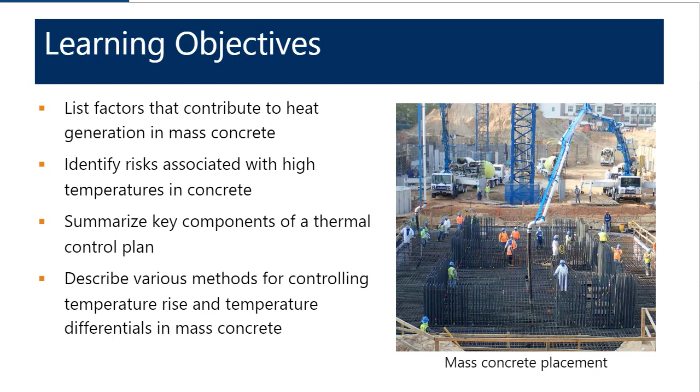So here's an overview of the four main topics that we plan on tackling today. We want to understand how to identify mass concrete, how to specify mass concrete, what are the critical components for developing a thermal control plan, and ultimately how to execute and implement it in the field.

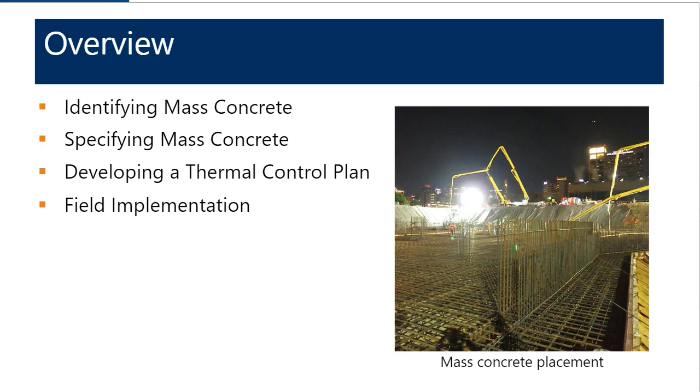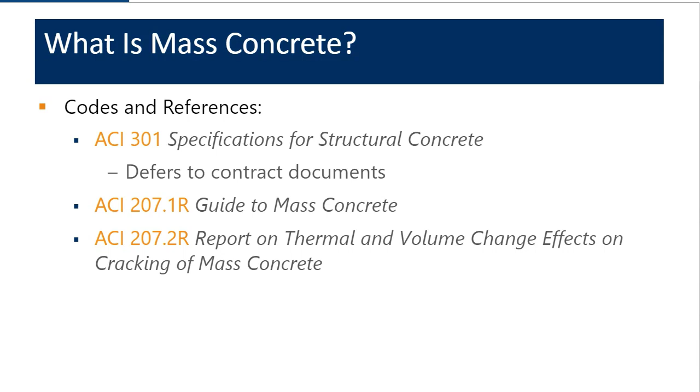So let's talk about mass concrete. How do we know it's mass concrete? As we dig into this topic, folks should understand that there are ACI references, specifically ACI 301 and ACI 207, mass concrete, that can help with understanding mass concrete. ACI actually has a definition of mass concrete. If you look at the ACI terminology document, they provide this wonderful definition for mass concrete.

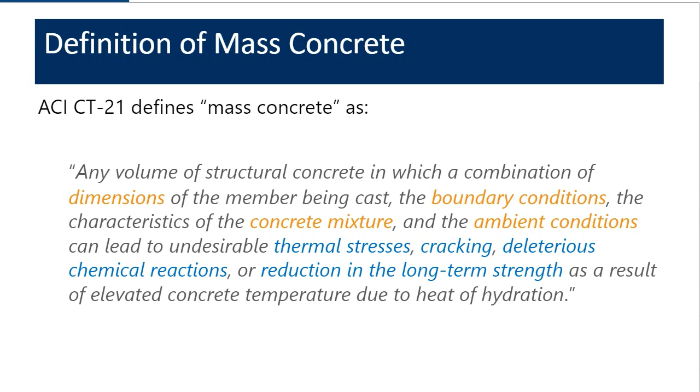And if you read this definition, what you'll notice is the definition of mass concrete is kind of mass concrete. It doesn't specifically identify the size or the dimensions of a mass element. So what is mass concrete? Well, how is this any different than maybe a concrete slab on ground that's 6 inches in thickness?

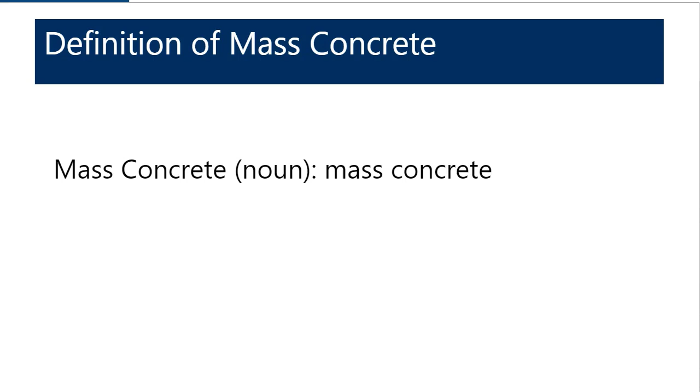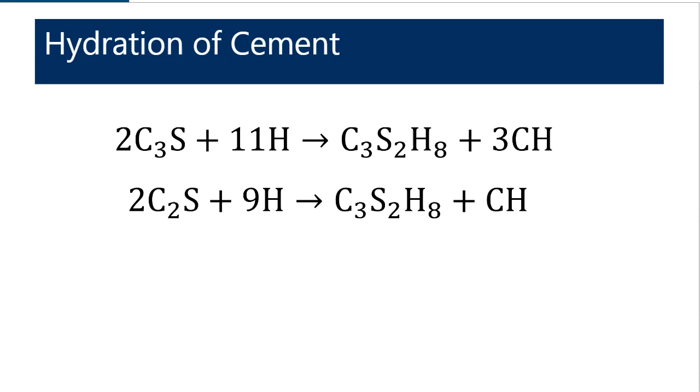So what we need to remember is concrete is chemical. I don't necessarily want you folks to understand this chemical equation that's on the slide, but what I want you to understand is that the hydration of cement is an exothermic chemical reaction. If you take a little bit of water and a little bit of cement and put your hand over it after it's been mixed, you can actually feel the heat that's being generated. If you take a lot of cement and a lot of water, you can end up with a lot of heat. That's what we're concerned about, is the amount of heat that's being generated.

So for some mass elements, that exothermic chemical reaction can generate temperatures up to 160, 170, and in some cases, if precautions aren't taken, up to 200 degrees Fahrenheit, which is a significant amount of heat when you compare that to boiling water, for example.

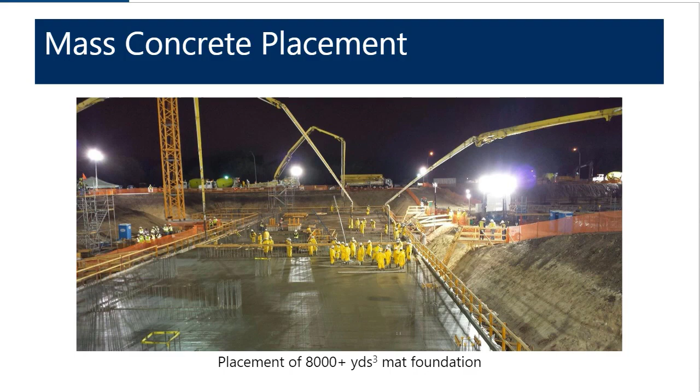So what's the problem? The big issue is cracking. The two things that we want to think about are thermal cracking and a phenomenon called delayed ettringite formation, which can occur later, that can also cause cracking.

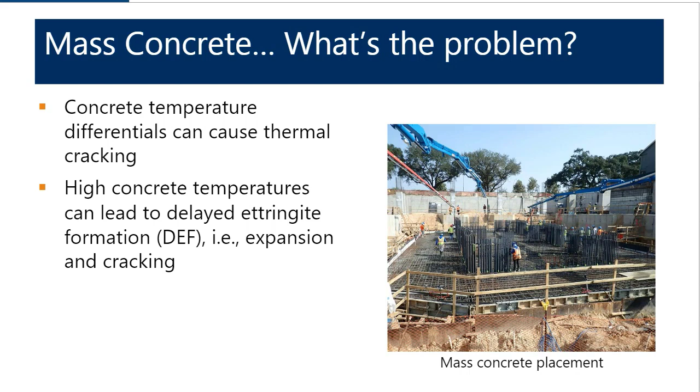So let's talk about thermal cracking. How does that occur? Here's a column, 8 foot in diameter, that had thermal cracks shortly after it was placed. The temperature difference between the cooler surface of the concrete, which can contract relative to the warmer inner core of the concrete, results in tensile stresses along the surface. And when those tensile stresses on the surface exceed the in-place tensile strength, you can get cracking.

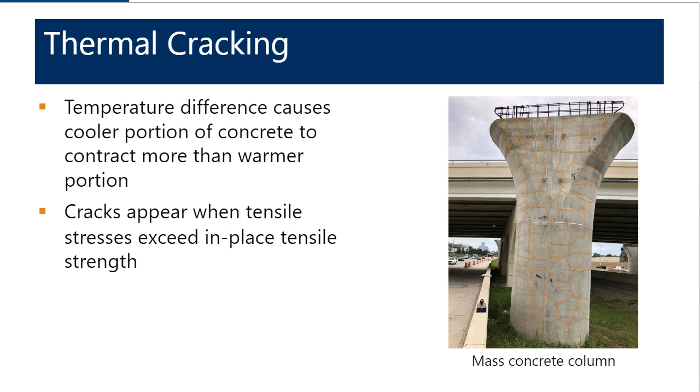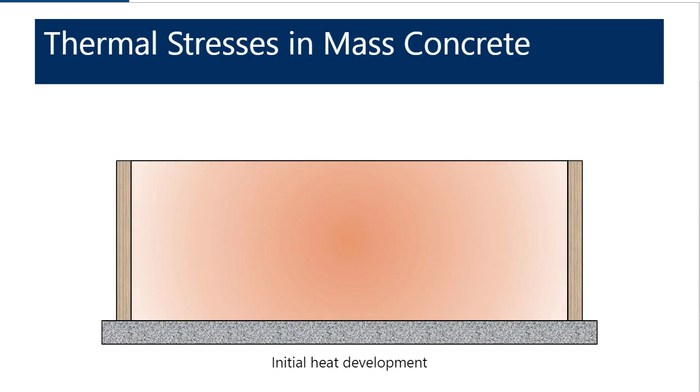So here's a schematic diagram showing the initial heat development of a mass element that's placed on a mud slab, for example, and formed up on the sides. As that heat continues to generate on the inner core, what you'll see is the surface then cools. And as those tensile stresses are introduced, you'll end up with cracking at various points along that element.

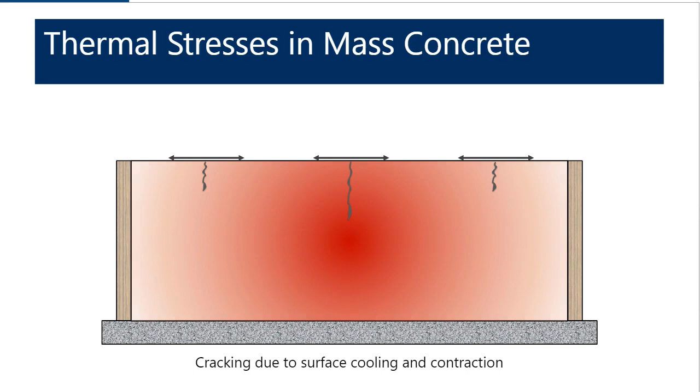One of the other things that we're concerned about is this phenomena called delayed ettringite formation. DEF, or delayed ettringite formation, is the formation of ettringite after the concrete has already hardened, which can later cause the expansion and cracking of the concrete.

Under certain circumstances, primarily exposure to elevated temperatures during curing, the ettringite is suppressed and then may form after the concrete is hardened. The volume of the ettringite compound is larger than the volume of the original component materials, which can lead to the internal expansion and subsequent cracking of the hardened concrete.

So Elizabeth is now going to talk about specifying mass concrete.

Thanks, Jacob. So let's go back to that ACI concrete terminology definition of mass concrete for just a minute. ACI's definition essentially says that a combination of dimensions, boundary conditions, the concrete mixture, and ambient conditions are going to lead to thermal stresses, cracking, deleterious chemical reactions like DEF, or potential reductions in long-term strength gain, all due to the elevated heat of hydration of the cementitious materials. And that's really what makes mass concrete.

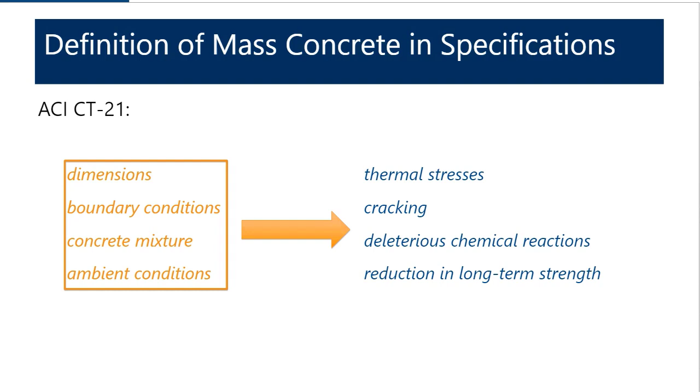So let's go back to that ACI definition again. It's not just the dimensions, but really the combination of the dimensions, boundary conditions, concrete mixture proportions, and ambient conditions that make something possibly mass concrete. And so newer specifications, like I'm about to show, actually take all of these factors into account.

And so here's another specification that we've dealt with. This particular specification, just like the last one, requires all elements with a section thickness greater than 3 feet or more to be considered mass concrete. But it also includes a portion that says that it's any system that approaches a maximum temperature of 158 degrees Fahrenheit within the first 72 hours.

And that way, it can also include elements that are thinner than 3 feet that may have other reasons for that heat gain, whether that's related to the environmental conditions, the concrete mixture proportions, or the boundary conditions, or any combination thereof.

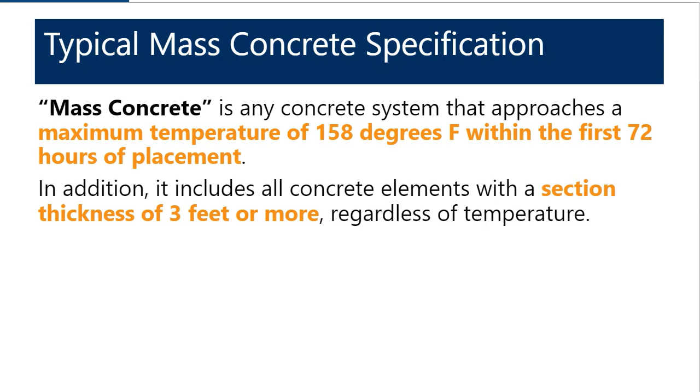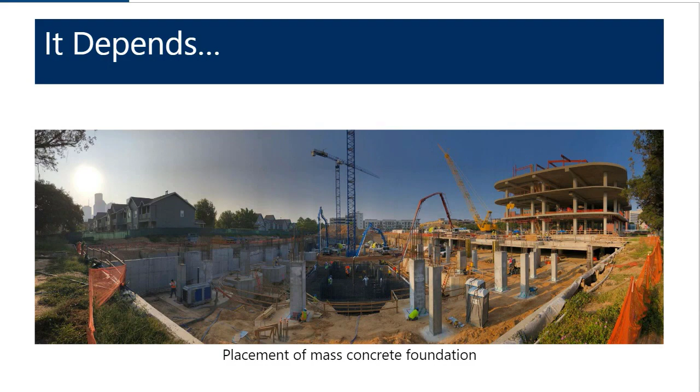So really, what is mass concrete? An engineer's favorite answer is it depends. And as it depends on a lot of things, ACI has recently published some revised guidance on how to define mass concrete. Specifically, ACI 207.1, which is the Guide to Mass Concrete, now talks about two categories of what they're calling mass and thermally controlled concrete.

The first category is traditional mass concrete. So these are large placements that many of you probably think of when you think of mass concrete. Things like dams, abutments, foundations, slabs, very large elements where the thickness is going to govern the temperatures that are generated.

But there's also this newer category that they've talked about called thermally controlled concrete. And these are typically smaller placements. In these cases, the temperatures are more governed by the specific concrete mixtures, which have a high potential for temperature rise. This may be because they contain a lot of cement or cementitious material, or it may be because they're designed to achieve very rapid early strength gains. The more rapid your strength gain, the higher potential you have for early age temperature rise in your mass concrete.

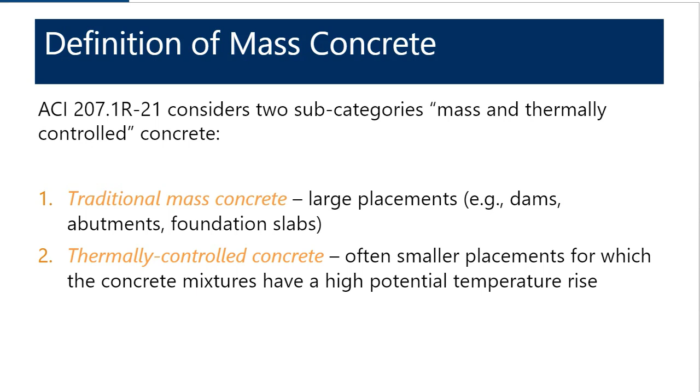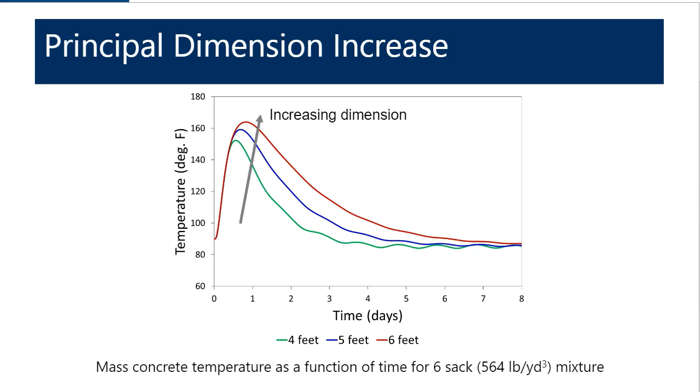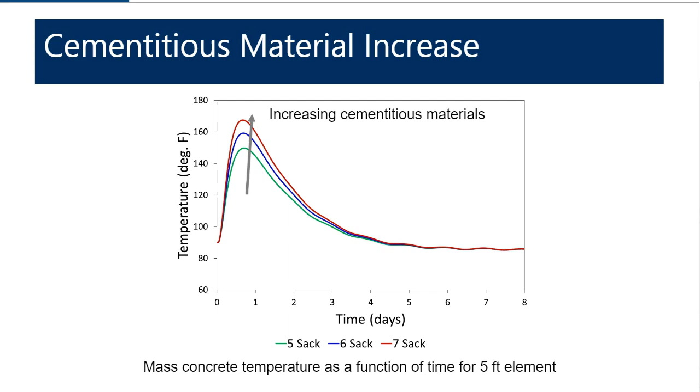The cementitious materials similarly have an effect. This graph shows the impact of increasing the total amount of cementitious material, or cement plus SCMs, in the mix. For example, an increase from a 5-sack mix with 470 pounds of cementitious material, all the way to a 7-sack mix with 658 pounds per cubic yard. Just like with increasing the dimension, as you increase the total amount of cementitious material in the mix, there's also an increased potential for temperature rise.

You can have an element that's, say, 6 feet thick but only has 300 pounds of equivalent cement content, and that might not require a thermal control plan even though it's 6 feet thick. However, you can also have an element that's 2 feet thick with 1,000 pounds of cementitious material, and even though that's only 2 feet thick, that's considered mass concrete because it falls into this class of thermally controlled concrete. We've actually encountered situations where we've had 2-foot thick elements that we've had to write thermal control plans for because the concrete had so much cement in it.

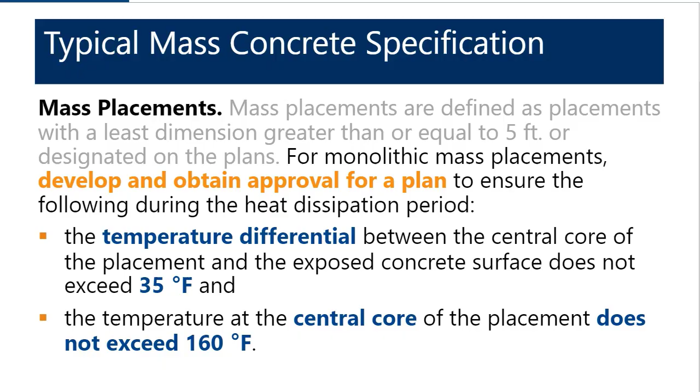So let's talk a little more about these thermal control plans. A thermal control plan is a document that describes the specific measures used to control these temperatures, both the maximum temperature and the maximum temperature differences. It also includes specific methods that are used to demonstrate that these limits are not exceeded.

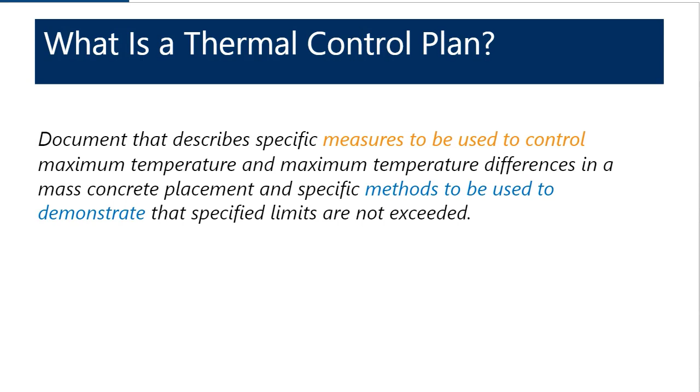Typical contents will include things like the concrete materials and mix design, the predicted temperature rise of the concrete, which is based on the concrete materials and mix design, the element dimensions, boundary conditions, and so on—all the factors that contribute to the definition of mass concrete. It will include limits on concrete placement temperatures, based on those predictions of temperature rise. It'll include instructions for monitoring the temperatures in the placement to make sure those limits aren't exceeded. It'll include surface temperature controls, like applying insulation to make sure the differentials aren't exceeded, in addition to how long those controls need to remain in place.

It will also include contingencies. What should you do in the event that you either exceed your maximum temperature or exceed your maximum temperature differential? Or, in better practice, what happens if you come close to exceeding those, so that you can take steps proactively to avoid exceeding those limits in your actual placement?

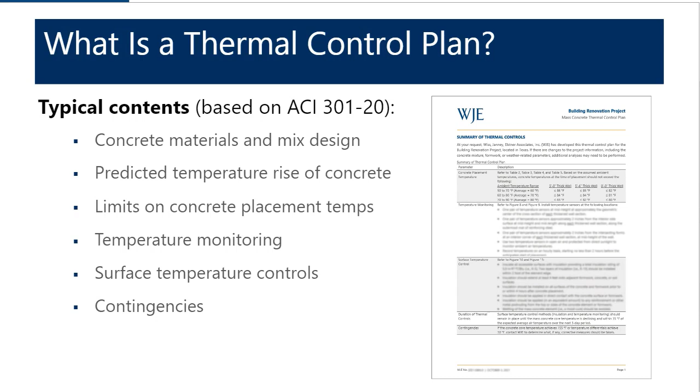There are 4 basic steps to developing a thermal control plan. The first is to review the concrete mixture design and project documents to understand what the system is. Using that information, you conduct a thermal analysis of the mass concrete placements. Then, based on those analysis results, you provide recommendations for methods to control the concrete temperature and instructions for measuring the concrete temperatures. We'll address each of these briefly.

We'll start with the first two, which is reviewing the mix design and conducting the thermal analysis. As we've talked about, mass concrete temperature is a function of several factors, including the element size, the concrete mixture design, construction methods such as the use of formwork or insulating blankets that might help trap heat in the placement, and environmental conditions, such as the time of year.

If you're placing in warm months, you might have a greater potential for temperature rise, but if you're placing in cooler months, you may have a greater potential for thermal differentials or thermal gradients that might cause cracking. It'll also include things like the temperature of the concrete when it's placed, how long it takes to place the concrete. And then there's also pre and post cooling methods that you can use to help control the temperatures of the concrete, either before or after it's placed. We'll talk about each of these.

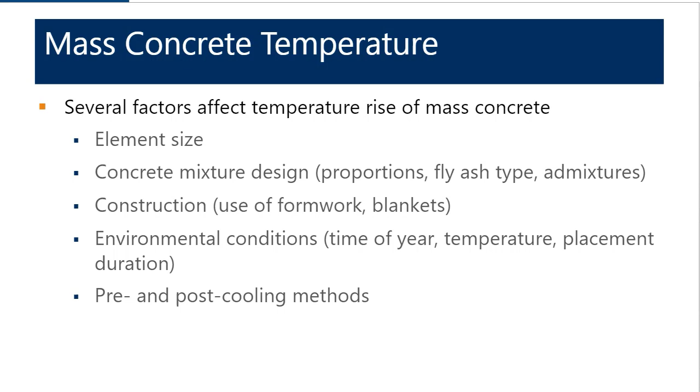All of these factors influence the potential temperature rise in a mass concrete placement. And to develop a thermal control plan, it's often useful to perform a thermal analysis that takes into account all of these factors in order to predict the actual temperatures for the placement.

These factors are then considered for many different combinations of environmental conditions, concrete placement temperatures, and insulating conditions. We can use this thermal analysis procedure to proactively address concerns related to mass concrete placements before concrete is even placed. We use this to develop our understanding of how the concrete element will respond to these changes, so we can specify what temperatures and insulating conditions we need for various environmental exposures and concrete mix designs, in order to not exceed the project's specified maximum temperature and maximum temperature difference limits.

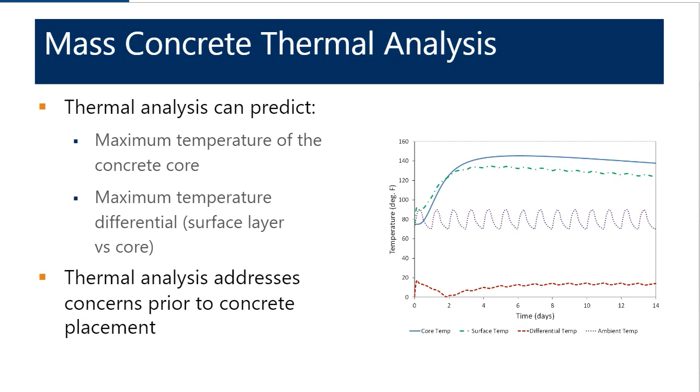As we've talked about, the concrete mixture design and total cementitious materials have a very large impact on the total amount of heat generated. There are ways we can reduce some of the heat generated by a concrete mixture, and one of the most effective ways is by using a high percentage of fly ash, up to 50% depending on the type of fly ash you use.

Class F fly ash is a particularly efficient material for reducing heat generation in concrete. It can help reduce the amount of heat released by a concrete mixture by up to about 50% of the equivalent amount of cement it replaces. Class C fly ash is not as efficient as Class F fly ash at reducing temperatures; typically it generates about 80% of the heat of the cement it replaces. Slag is a little less efficient, typically between about 80 and 90% of the heat of the cement it's replacing. But using SCMs is a very effective way, especially Class F fly ash, of reducing the heat signature of your concrete mix.

In terms of temperature differentials and the risk of thermal cracking, the use of different concrete aggregates can also help reduce that risk. In particular, limestone has a lower coefficient of thermal expansion than granite. So if you have the option to use a limestone aggregate versus a granite coarse aggregate, because the concrete containing limestone will have a lower coefficient of thermal expansion than an equivalent mixture containing granite, the risk of thermal cracking can also be reduced through the selection of those lower coefficient of thermal expansion aggregates.

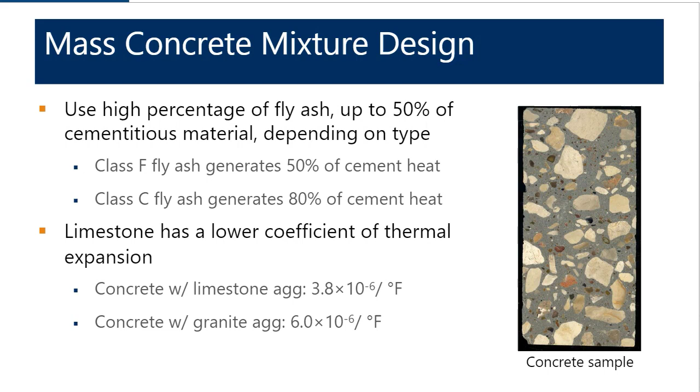One of the ways we can enhance a thermal control plan and our understanding of mass concrete behavior is by measuring the adiabatic temperature rise of a concrete mixture. The adiabatic temperature rise is sort of like a heat signature of a concrete mixture—basically how much heat or temperature rise can be generated by a concrete mixture based on its total amount of cement, its SCMs, and the particular ones being used for a project.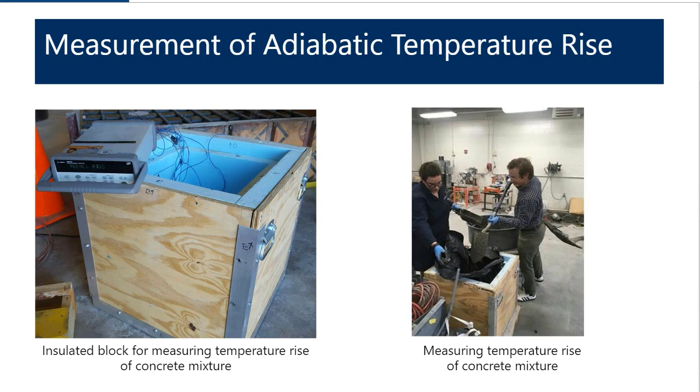So basically what that means is if you have a very large element, say a 12-foot thick element, you can expect the interior of that element to rise by about 80 degrees Fahrenheit. So if you're trying to limit your total internal temperature to less than 160 degrees Fahrenheit, this might relate to your placement temperature. If you have a 160 degree maximum and expect 80 degrees temperature rise, you want to make sure your placement temperatures are less than 80 degrees to stay under that limit.

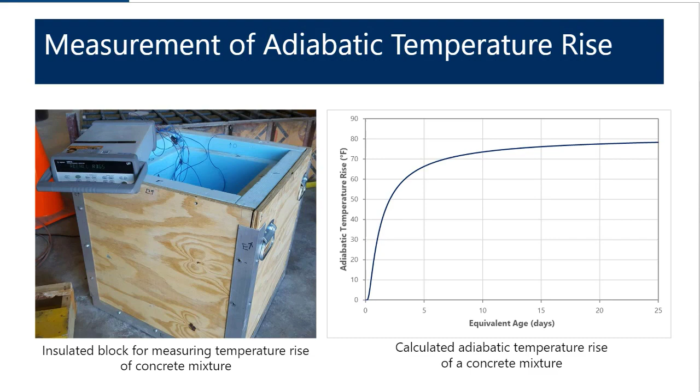The second part of developing a thermal control plan, the third step rather, is to provide methods for controlling the concrete temperatures. We've talked about controlling peak temperatures by limiting the placement temperature, which is called precooling. You can also post-cool your concrete, using cooling pipes to draw heat out while it's curing. Jacob will talk in more detail about both of these options, but both will come into play in the thermal control plan.

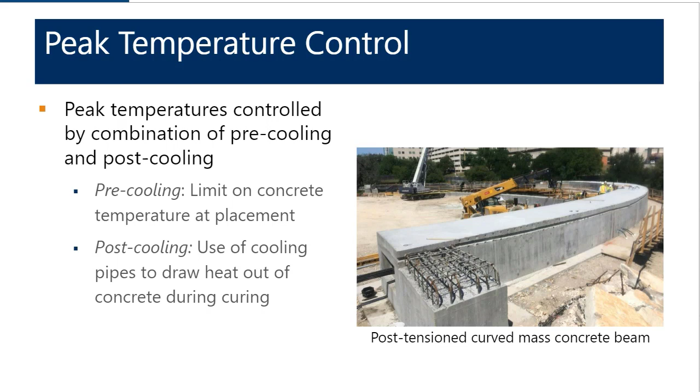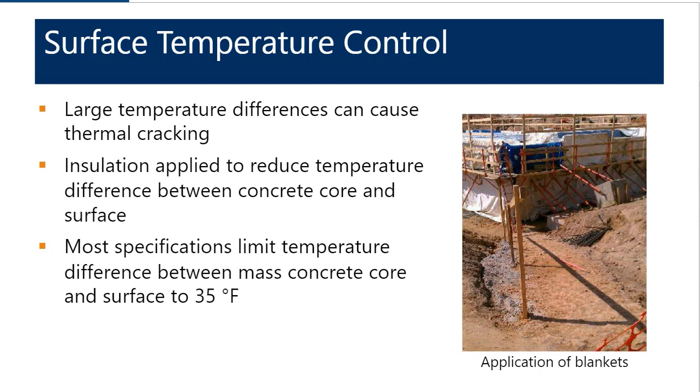For surface temperature controls, because large temperature differences can cause thermal cracking, one of the things you often need to do with a mass concrete placement is apply insulation to the surface of the element to help reduce the temperature difference between the interior core and the surface. The insulation slows the rate that the surface is cooling, so those temperature differences don't become too large. Most specifications limit the temperature difference between the center and surface to about 35 degrees Fahrenheit, but you can look at alternatives, such as a performance-based temperature difference limit.

This temperature difference limit is based on the risk of cracking, and it considers the specific coefficient of thermal expansion of the concrete mixture. Recall that certain aggregates will expand more or less than others. It also considers the maturity of the concrete with respect to compressive strength, tensile strength, and modulus of elasticity, and the degree of restraint. I'll come back to this maturity in just a second.

Going back to the idea of maturity, you might be familiar with a maturity curve for compressive strength. Basically, this calculates maturity, which is essentially the product of the age of the concrete times its temperature history, in a very general sense. Using that maturity, you can plot as a function of maturity what the compressive strength development of the concrete is, and get what's called a maturity curve for compressive strength.

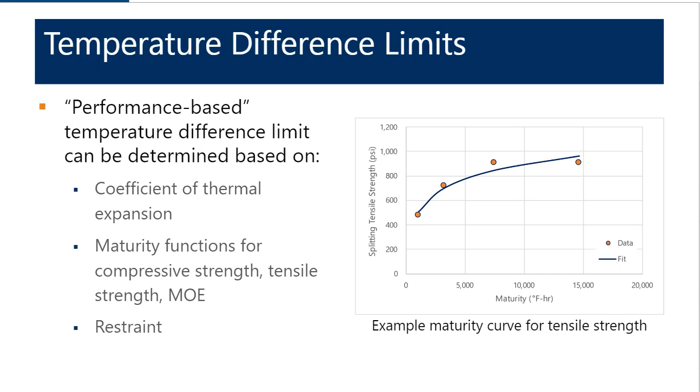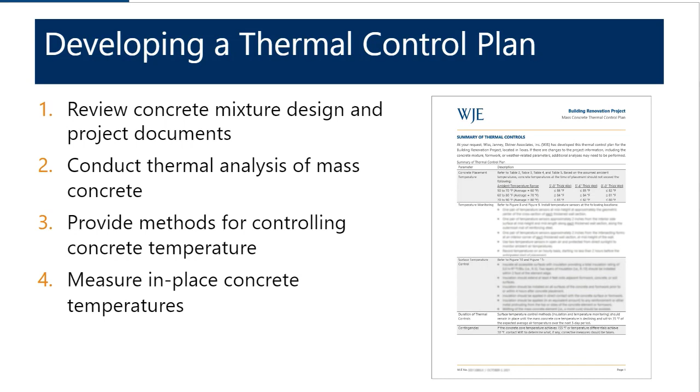The last portion of developing a thermal control plan is to develop methods for measuring the in-place concrete temperatures. Monitoring concrete temperatures is performed using temperature sensors, and typical placement for these sensors is at the geometric center of an element, or at the location where you expect the highest temperatures to be achieved. Usually this is the geometric center, but sometimes, depending on if the element has blockouts or other features, it might be a little offset. So you want to install a sensor at that location.

We also recommend that temperature sensors are installed in ambient air to measure the ambient temperature and atmospheric conditions, as far as validating the thermal model and also understanding what the risk of thermal cracking would be if insulation were to be removed.

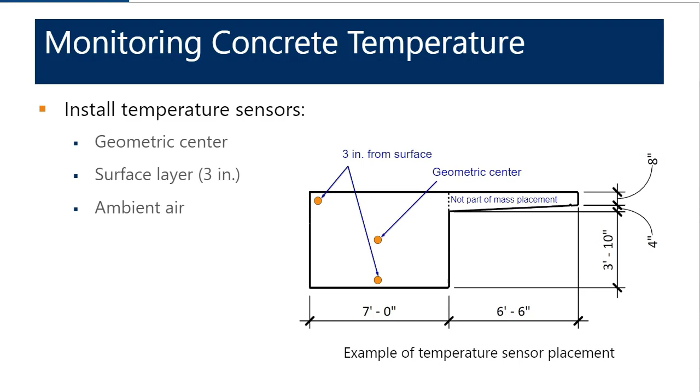So now I'm going to turn it back over to Jacob to talk about how we actually implement these recommendations in practice.

So this is the fun part. Now that we've specified it, we've analyzed it, developed our thermal control plan, now we get to actually have some fun. When we start talking about implementing a mass concrete placement, one of the first things we want to do is a pre-placement meeting. We want to figure out how we're going to monitor and measure the placement temperature, the controls we're going to put in place for the temperature of the mass element, and how we're going to monitor the temperature of the element as it cures.

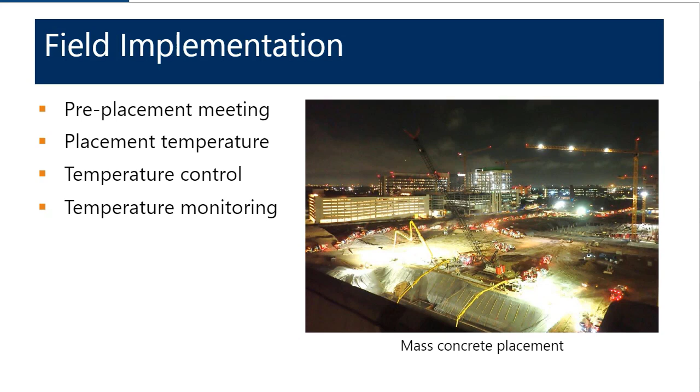Pre-placement meeting. If you're going to install or place a 2 to 5,000 yard mat placement, or even a 10,000 yard mat placement, one of the things to think about is having a pre-placement meeting. There are several things that need to be discussed. Here on the slide, we're looking at probably the 4 top things that we think should be discussed.

The first one is, who is measuring the placement temperature? Is that the laboratory of record, the contractor, the inspector, an owner's rep, or the engineer of record? This needs to be discussed at the meeting. Perhaps the laboratory of record does periodic temperature measurements and the contractor measures every truck.

Who's responsible for accepting and rejecting the concrete? Is it the place and finish contractor? Is it the general contractor? Is it the owner's rep? These are things that have to be discussed at the pre-placement meeting. So if there's a truck that shows up to the job site that's significantly hot, what do we do with it, and who's responsible for sending it back?

Plan B: if you're going to install concrete at a rate of 500 to 1,000 yards an hour, there should be a plan B, whether that's a pump on standby, and there may even need to be a plant on standby. If the concrete plant breaks down, you want to ensure that the concrete placement progresses as expected.

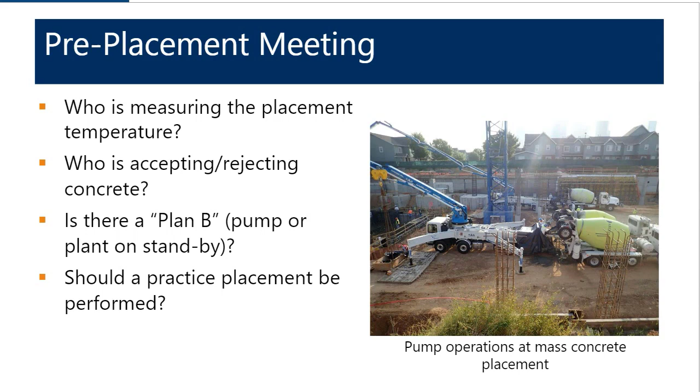Concrete placement temperature is a very significant factor in mass concrete. The general rule of thumb is that a 1 degree increase in the placement temperature is going to cause approximately a 1 degree increase in the maximum temperature. Again, that's a rule of thumb, but it holds true in most cases.

As a result, the time of day and the season in which you place concrete affects your placement temperature, which ultimately will affect your maximum core temperature for a given mix design and element type. So one of the easiest ways to reduce your placement temperature is to place concrete at night or during cooler portions of the time of year.

Right now we're having cool portions of the time of year. Depending upon what your control is over the schedule, you may consider moving up some of your mass placements at this time of year as opposed to doing them in the middle of the summer, where your ambient conditions are going to be warmer. As a result, your concrete placement temperatures will be higher without the use of pre-cooling measures.

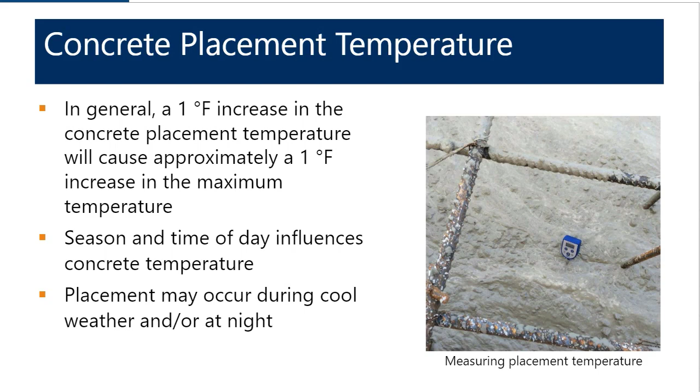As a result, as you might expect, the placement temperature requirements for a thermal control plan given in the plans and specs will impact the contractor and will impact the overall cost to build the project.

Infrared thermometers are very helpful for monitoring the placement temperature of concrete. That's something that can be used for larger placements where the pour rate is very high, meaning up to 1,000 yards an hour. It may not be practical or efficient to use a traditional temperature measuring device on the plastic concrete, and it may be easier to use an IR or infrared thermometer as the concrete is coming out of the truck.

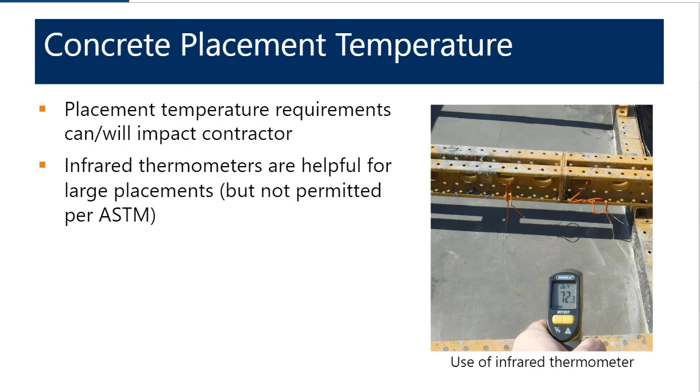The key thing to keep in mind is the temperature specifications aren't necessarily put in place for mass concrete specifically. This temperature specification specifies that the concrete temperature at the point of placement needs to be below 90 degrees.

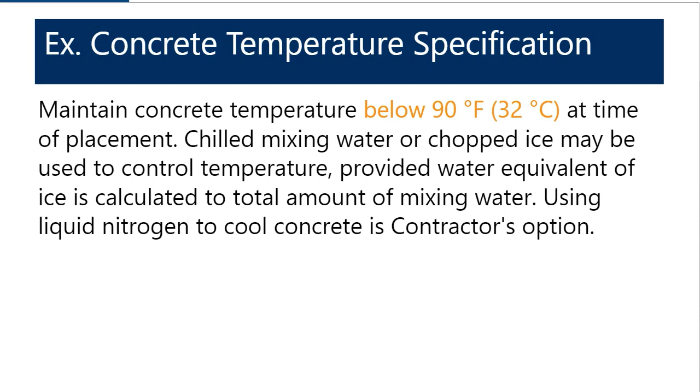This is an example of a project we worked on where a thermal control plan wasn't actually put into place. The contractor and design team felt that as long as the placement temperature was less than 90 degrees, the concrete core temperature should be fine.

So they installed temperature sensors into the mass element. What happened is the contractor, per the plans and specifications, was able to maintain a placement temperature of under 90 degrees Fahrenheit. However, for that particular mix, the maximum temperature ended up going up to over 172 degrees Fahrenheit. The specs did say the core temperature needed to be 160, so then there became a dispute about whose responsibility it was, because the concrete temperature exceeded 160 degrees Fahrenheit.

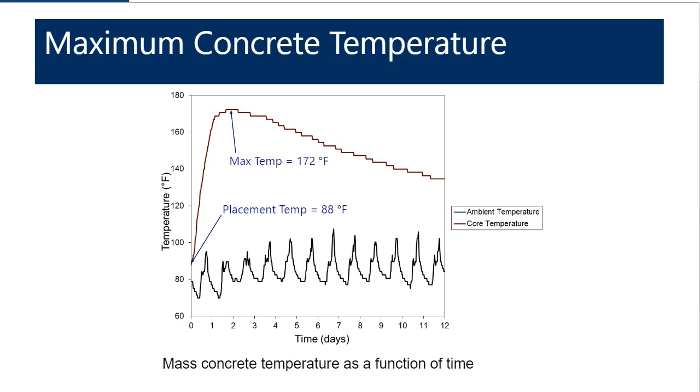Pre-cooling of fresh concrete can be done in a variety of different ways, and we're going to talk about a few of those.

One of the simplest ways of pre-cooling fresh concrete is through the addition of ice. The general rule of thumb is about 7 to 10 pounds of ice per cubic yard can reduce the placement temperature by approximately 1 degree. This will vary depending upon the time of year, and whether those bags of ice are actually still ice when they're loaded into the truck, or if they've started melting.

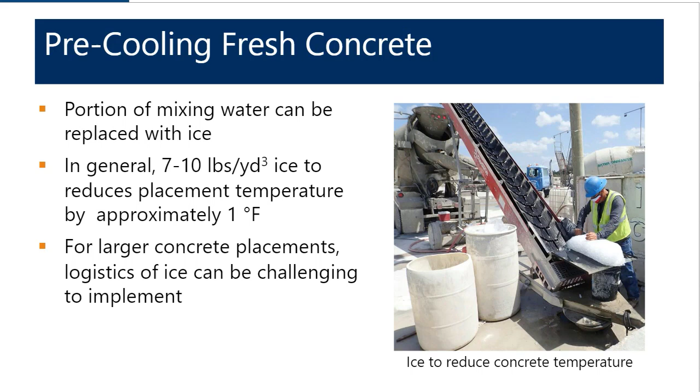One of the more efficient ways, sort of the sledgehammer approach to pre-cooling fresh concrete, is the use of liquid nitrogen. Liquid nitrogen is very efficient at producing lower concrete placement temperatures, and it can do a much better job than chilled water or ice.

One of the challenges with this approach is not all ready mix suppliers have access to liquid nitrogen. In some markets, there aren't any ready mix suppliers with access to it. For larger projects, the contractor may be able to set up its own liquid nitrogen station, but a lot of times, if there's not enough mass elements, the costs for the setup aren't able to be justified. The nice thing is, if it's available in a given market, liquid nitrogen can reduce temperatures by as much as 35 degrees, and in some cases a lot more, depending on the initial starting temperature.

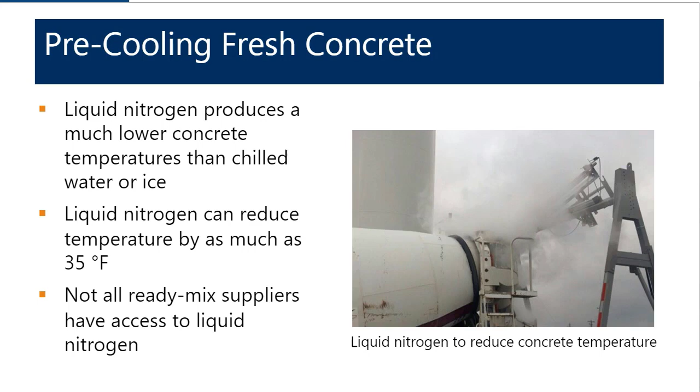Another approach to cooling mass elements is post-cooling. The concrete is placed as normal, and then cooling tubes are installed into the element prior to placement, and water is run through those cooling coils, cooling the concrete as it sets, gains strength, and hardens.

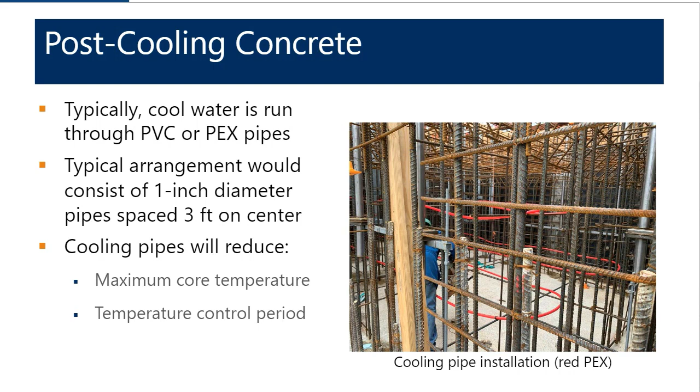The nice thing about cooling pipes is they will reduce the maximum core temperature, and they'll also reduce the temperature control period.

Depending upon the type of project that you may have, you may be able to install cooling pipes and reduce the time period in which your temperature control period is in play.

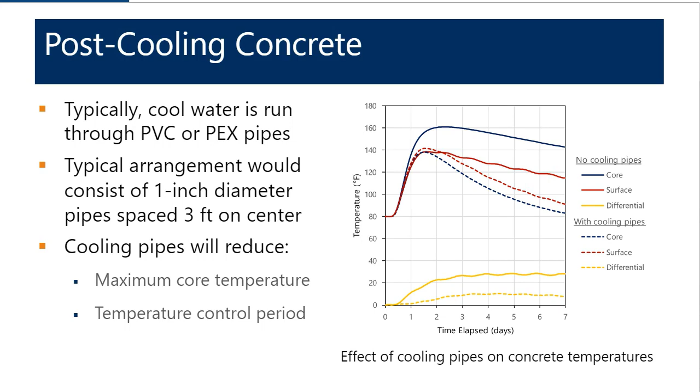After the concrete is placed, you want to monitor the internal temperatures of the concrete element, typically recorded every hour. The purpose is to verify that the temperature profile is performing as expected, meaning the in-place temperature measurements align with the theoretical temperature profile calculated during the analysis that was part of the thermal control plan. Ultimately, these temperature measurements are typically submitted to the design team to confirm they were within the project specifications.

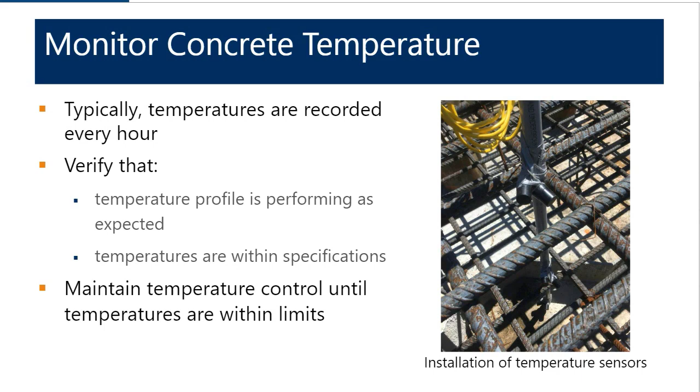In some instances, a lot of blankets are only 2 to 3 in terms of R value, so you may have to add multiple layers to get an equivalent value. One thing to keep in mind if you're a contractor with larger elements is that some of these insulations can be a long lead item and may take 1 to 3 weeks to actually get onto your job site.

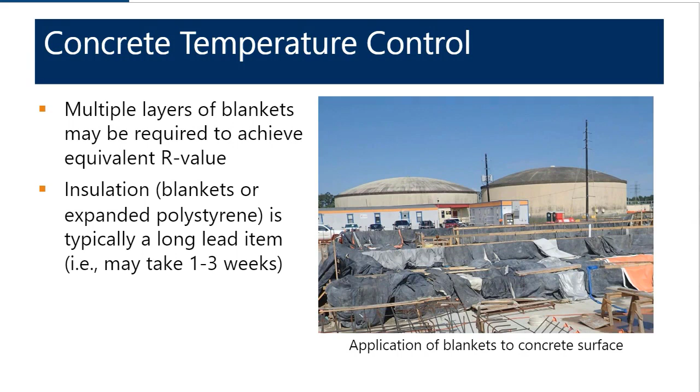If you are using absorptive blankets, something that's going to absorb moisture or water if it rains, you'd want to put down some plastic sheeting. You can see on the right-hand side of the slide that plastic sheeting was installed because an absorptive blanket was used. The idea is that the water will have a cooling effect and can cause your temperature differentials to increase. That's why we recommend that wetting of that mass element should be avoided.

Many specifications often require that a wet cure be applied to concrete elements. It's our position that wetting of the mass concrete element has a cooling effect and increases the likelihood of larger temperature differentials, and can therefore increase the likelihood of thermal cracks.

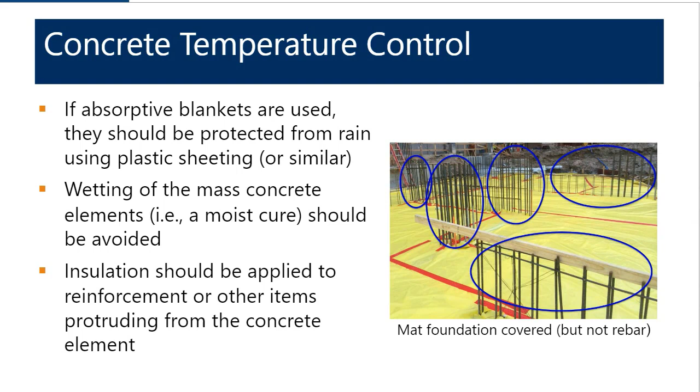The unfortunate thing in this instance is that the type of insulation they used was less effective because, for example, if you put in an R5, due to the placement of the ribs, it effectively was acting as an R2 or R2.5. So if you do something like that, you have to keep that in mind.

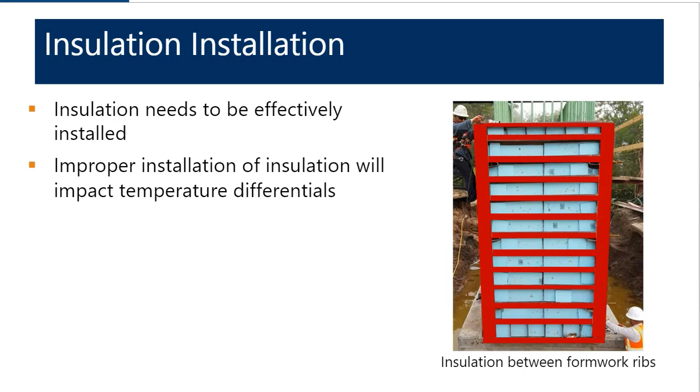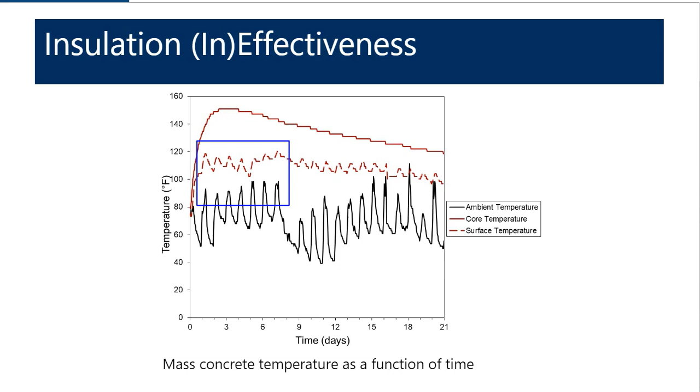So how long does the temperature control period last? Well, it depends - as Elizabeth said, that's a favorite answer of ours. Sometimes the specifications state the temperature control period, but in general, the temperature control should be maintained until the risk of cracking is minimal.

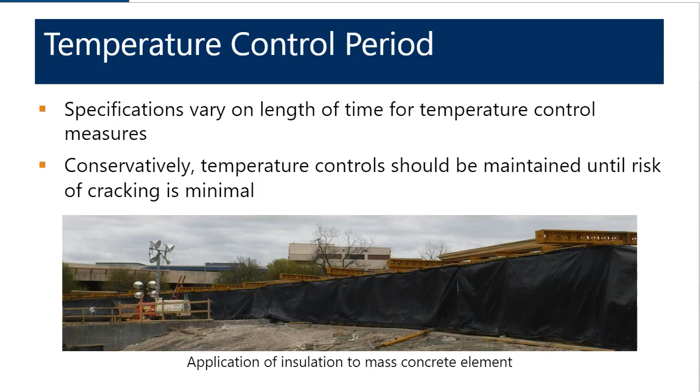So in summary, for mass concrete, the primary concern is the temperature of the concrete element. The two things we're primarily concerned with are the temperature differentials between the core and surface layer contributing to thermal cracking, and high internal concrete temperatures which can later lead to delayed ettringite formation, causing expansion and cracking of the concrete element.

As a result, we want to be able to formulate and develop specifications that define the mass concrete. We want to be able to analyze it, prepare a thermal control plan, and then use those things to help with the concrete placement efforts.

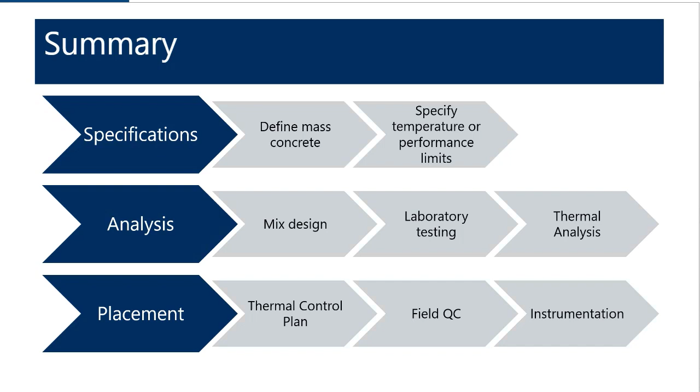If you're a specifier, some of the key things you need to be thinking about when specifying mass concrete is identifying the mass elements. This can be done by size, geometry, cementitious content, surface area - there are different ways to do it, but it needs to be clearly identified in the project plans and specifications so the contractor can plan it, bid it, and execute accordingly.

One thing to realize is that we're no longer using concrete mixtures with relatively low cementitious contents. As structures get larger, spans get larger, column spacing gets larger, we're using higher strength concrete with more cementitious materials in it. As a result, these high-strength structural concrete mixtures can generate significant amounts of heat - things we haven't necessarily dealt with 20 or 30 years ago.

If you're specifying mass concrete, you should maybe consider allowing the contractor to submit a performance-based temperature limit. That can, in some cases, cause the contractor to act in a more efficient way and move the project along in a more timely fashion.

If you're a specifier and you think you have mass elements on your project, one of the easiest things to do is require that the contractor submit a thermal control plan as part of the submittal process. In some cases, it might even make sense to specify that the thermal control plan be prepared by a licensed professional - as the engineer of record, that helps manage some of your risk and keeps things moving diligently. The final thing to think about is to consider omitting the wet cure of mass elements, since wet curing mass elements can increase the risk for thermal cracking.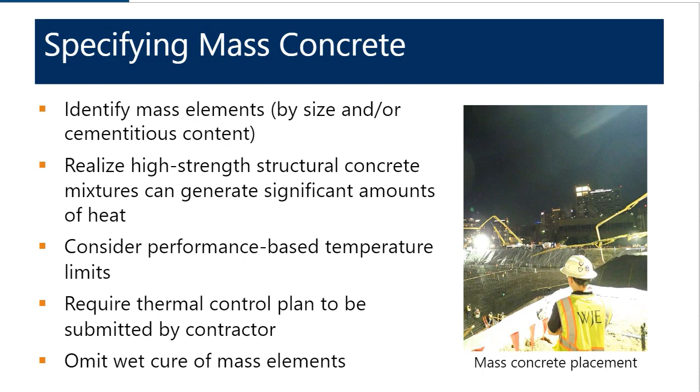When you analyze mass concrete, begin with the end in mind, as Stephen Covey would say. You can use low heat concrete mixtures with supplemental cementitious materials, like fly ash or Class F ash, even though it's difficult to get at this time. It's great for mass concrete elements, and you can use high dosages. We've worked on projects with mass elements using 40% Class F ash and 50% Class C ash.

Other things to consider are post-cooling options. If the project is right, these can expedite the construction schedule. If you're doing concrete elements near a large water source, like a river, you can use that cool water and feed it through cooling pipes without too much effort.

The other thing to comment on is utilizing the RFI process. I love the RFI process. Many folks think it slows things down, but I think it's great. We have good projects, plans and specs, but the RFI process allows folks to explore creative options for tackling challenging projects and figure out ways to solve different types of problems.

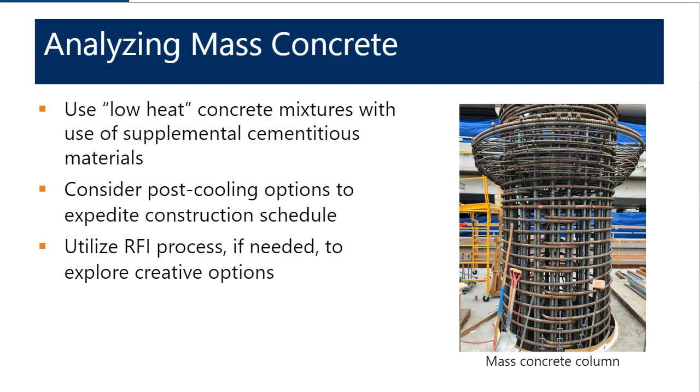Finally, key things to think about when placing a mass element: conduct a pre-placement meeting, as we discussed before. Understand the pros and cons of ice, liquid nitrogen, and cooling pipes. There are advantages to all of them, with time and cost considerations for each. Then monitor the placement temperature of the incoming trucks.

The final thing is planning for the temperature control period within the construction schedule. Sometimes elements need to be insulated and covered for 1 to 1.5 weeks. That needs to be factored into the temperature control period, particularly if you're a contractor planning to reuse that formwork for future placements.

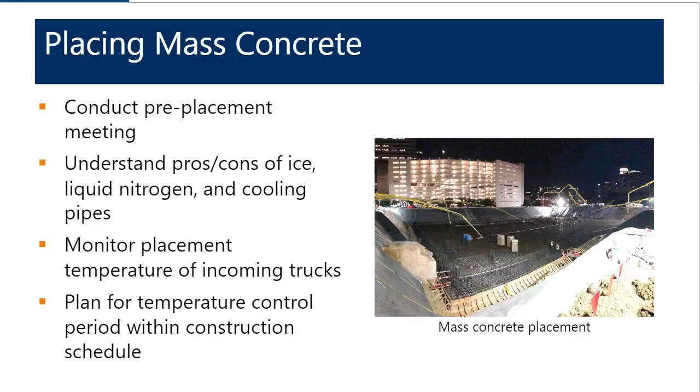Okay, let's take our first question. What is the typical workflow for developing thermal control plans between engineers, ready mix suppliers, and contractors? If performance-based thermal control plans are based on specific mix designs, are there design iterations of thermal control plans?

Jacob, did you want to take that, or would you like me to? I'll go ahead since it seems like Jacob might be muted.

The typical workflow is, ideally, if we can get involved in developing a thermal control plan early in the process, it helps everyone. It helps in terms of selecting a concrete mix design, because a thermal control plan or thermal analysis can evaluate a variety of candidate concrete mixtures to determine what might be useful for a particular project and what might be easiest to help control concrete temperatures and temperature differences. So typically, the earlier a thermal control plan can be developed, the better. It's often performed at the direction of the contractor, with the engineer of record then reviewing and approving the thermal control plan for use on the project. Ideally, the thermal control plan is prepared well in advance of concrete placement so that those pre-placement meetings Jacob discussed can be held.

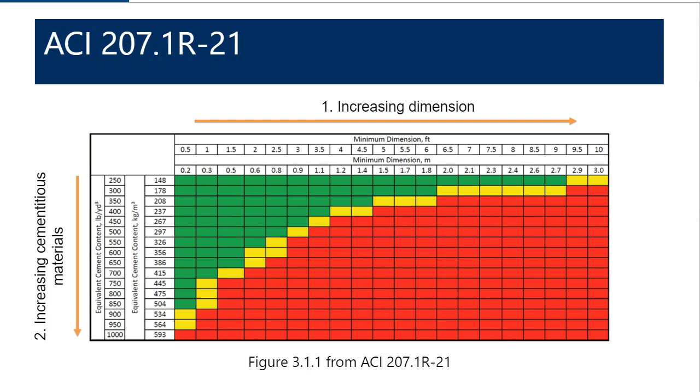So the risk of exceeding the maximum temperature is the risk of DEF happening. DEF requires a few different factors, which Jacob had talked about earlier. Let me pull up that slide really briefly. So it requires, first of all, temperatures exceeding 160 or whatever the maximum is for the project, but it also requires exposure to significant moisture in service and a materials chemistry that's susceptible to DEF.

So if temperatures exceed the specified limits, usually the next steps are to evaluate the risk of DEF. That can be done by evaluating the materials chemistry or through doing petrographic analysis, where you actually look at samples of the concrete under a microscope - which is actually what this photo is from - and determine if DEF has happened or if there's indicators that there's a risk of DEF happening in the future. So it's not necessarily a deal breaker, but it does require further analysis.

Okay, our next question. When third-party testing is done on the concrete, are temperatures taken at that point? So it depends. Most specifications require the concrete to be sampled at the point of placement, and as a result, the temperatures will then be taken at the point of placement.

Sometimes the concrete is sampled at the truck. The key thing to keep in mind for mass concrete is when we talk about placement temperature, we're talking about the temperature at the point of placement, not necessarily the temperature of the concrete coming out of the truck. Depending upon how you're placing the concrete, you can see an increase in temperature from anywhere from 2 to 4 degrees from coming out of the truck to the point of placement. Sometimes the pumping operations and other methods of conveyance will cause that temperature to increase. So it's very important that for the purposes of the thermal control plan, some of the temperatures, if not all the temperatures, are being measured at the point of placement, not necessarily just what's coming out of the truck.

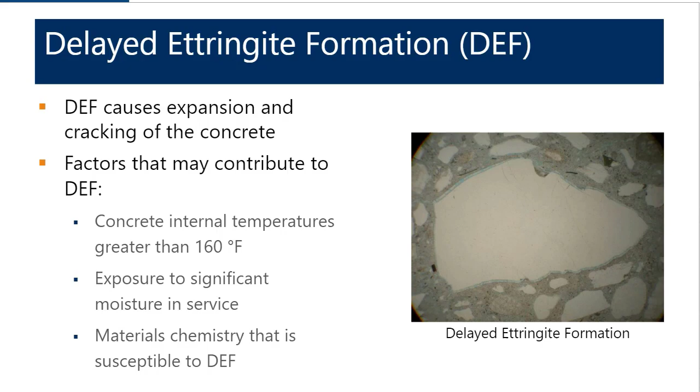Okay, our next question. What is the average length of time for monitoring, the temperature control period, and how is this determined? So the temperature control period is basically defined by how long you need to keep your insulation in place until the risk of thermal cracking is minimized. We talked about thermal cracking being driven by the difference in temperature between the interior of the concrete and the surface. So really it's how long until the temperature at the interior of your placement is within the allowable temperature difference from the ambient temperature.

So for very large placements, this could be several weeks, on the order of 3 to 4 weeks or so. But for smaller placements, it might be as little as 3 to 5 days. It really depends on the specifics of the placement and the results of the thermal analysis.

Okay, we've got time for one more question. This looks like a good one to end things on. I'm assuming WJE can develop the mass concrete temperature control plan - not a question, but you can go ahead and answer it as one. Absolutely. All right, keep it short and sweet.